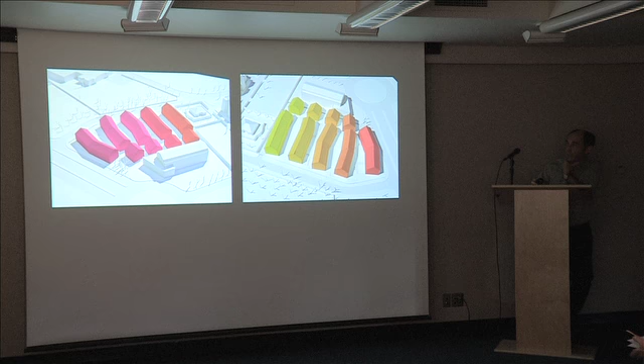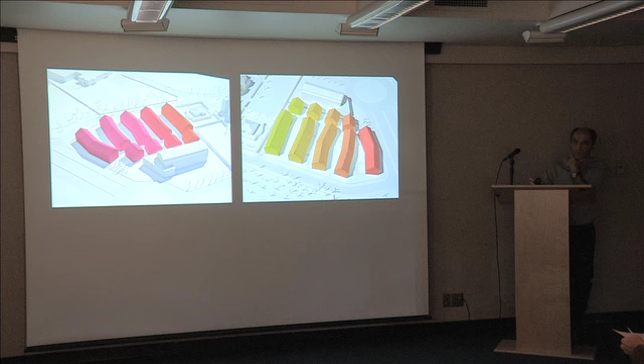And I think that -- I'm going to try to show this through 3 or 4 examples, depending on how long it takes. This one I think is a housing project in Spain which gives a fair account of what I'm trying to say. This was a competition for a public housing project, in which the regulations of the city for housing literally mismatch the needs of the client, which was a public client. That tension between those two conditions, I think, describes quite well how architecture faces, or how architects face very often, the reality of the problem.

On the one hand, the regulations basically define a geometrical container within which architecture had to be contained -- the shape of a traditional house with its pitched roof, 7 meters tall, 45-degree angle inclined planes for the roof. Within the boundaries of that mathematical or legal shape, everything could be done; outside those, nothing could be done. Which is a weird way of making the norm, because the norm should be about all things, but not capable of defining so clearly and so sharply.

And then on the other hand, we had to build 75 units. And the only way in which 75 units could be built was by using the whole volume that the legal norms allowed for.

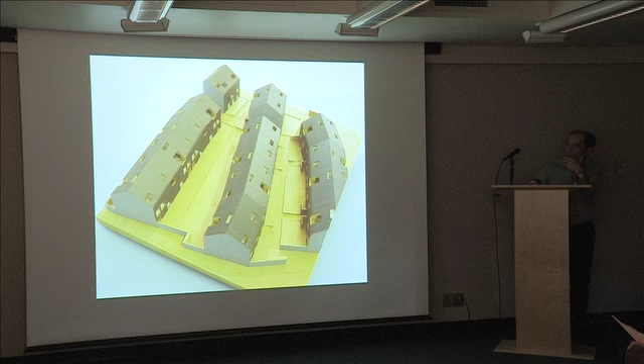So we had to occupy the whole section, and we had to work with a section that was given to us, with a profile that was given to us—not without irony—it was a profile defined legally, but that carries a tremendous amount of iconographic value. And that was, for us, the way in which this almost absurd problem of clients asking for things, and law asking for other things, and site conditions defining certain geometries and boundaries, etc.

We tried to resolve the problem within these three paradigms. One of them, of course, is repetition, because housing units, mostly public housing units, are the result of repeating a particular number of units. There might be several of them.

On the other hand, there is an issue of repetition and uniformity, and then there was also this issue of the iconographic container overlaid over the project by the law, and then the technical resort to prefabrication in concrete in order to create an envelope, a surface—what I guess Scott has referred to as a crust—that would provide, on one hand, uniformity for the whole number of different units and different conditions, thus defying repetition, and on the other hand, allowing us to change the perception of that iconographic profile, of that container with iconographic qualities that we were imposed or had to use.

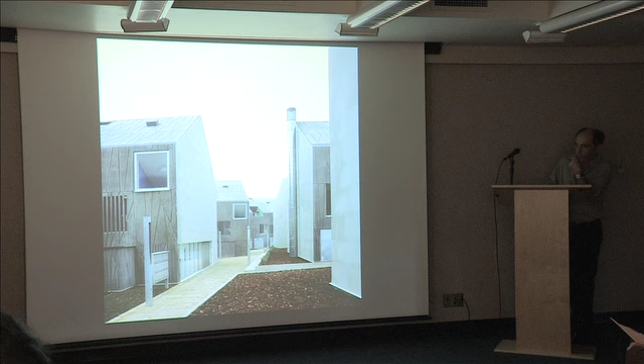And that's what the project is about. So at the end of the day, this is, I think, a very contemporary use of technological means—in this particular case, the technological means of prefabricated construction.

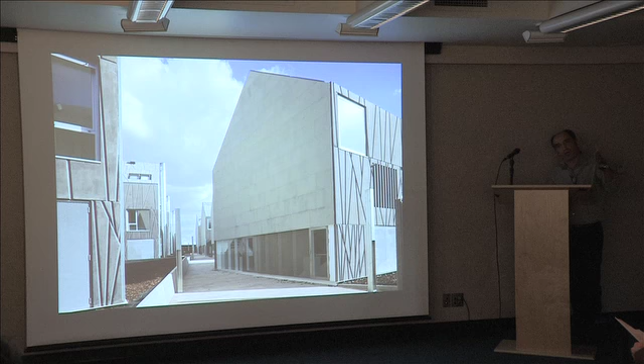Because prefabricated construction in concrete allowed us to introduce another layer to that idea of continuity, which is the ornamental quality of the striation of the concrete panel. This is basically the result of repeating a certain pattern, but by literal displacement and change of scale, change of level, or change of position, it increases a tension between the idea of the envelope as a kind of crust, creating a figure of continuity that has to do with the volume, independent from the repetition of units inside.

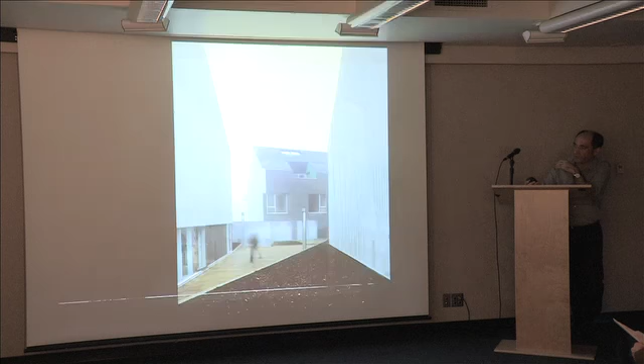And creating a unity that works for the spaces, which are actually even more important to us than the units themselves—the spaces within the units, the sort of pathways and gardens and internal streets that are created and built within the blocks.

These are views of the interior units, which are of two kinds. There are the ground floor ones, which are side to side, and they use the garden on both sides at the ground level.

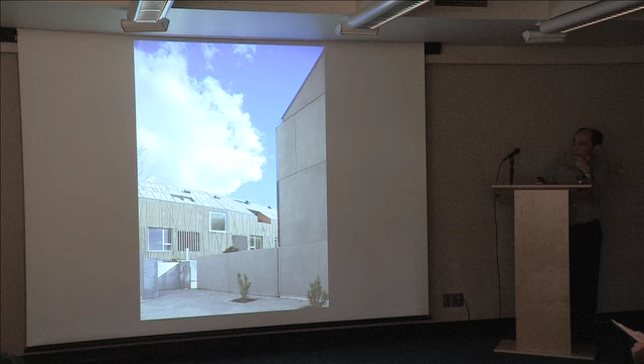And then the ones on top, in order to deal with and resolve the problem of the inclined plane of the pitch roof, we developed a kind of duplex unit that allowed us, depending on the orientation—north or south—to have two different kinds of conditions. In both cases, using the stair. One was based on the idea of having a double height.

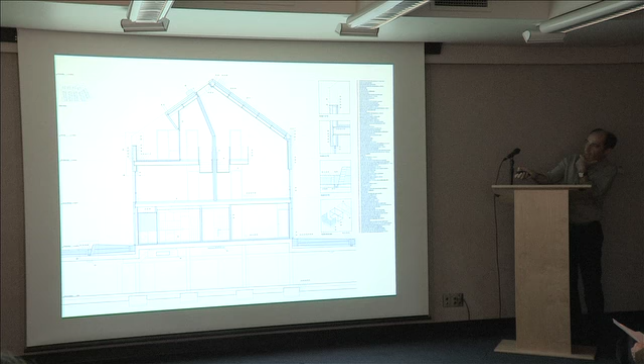In the case of the unit oriented towards the north, the double height allowed it to get sun or direct sunlight from the south. And the unit on the southern side used this little terrace, which is a kind of appropriation of an outdoor space—the same one that the units on the ground level are using.

This is the unit at the ground level that works in this direction, perpendicular to the longitudinal axis of the block. It's constructed around two units of bathrooms, and then the rooms are placed around in a rather open way within the limits of the number of bedrooms, and then some open or outdoor spaces are either embedded inside or left in between, in order to create continuity or connections perpendicular to the block.

With the gardens, while the duplex units above work in the opposite direction—along the longitudinal axis of the block. The one to the southern side has the terrace above, and the one to the northern side has the double height that allows for jumping over to the other side.

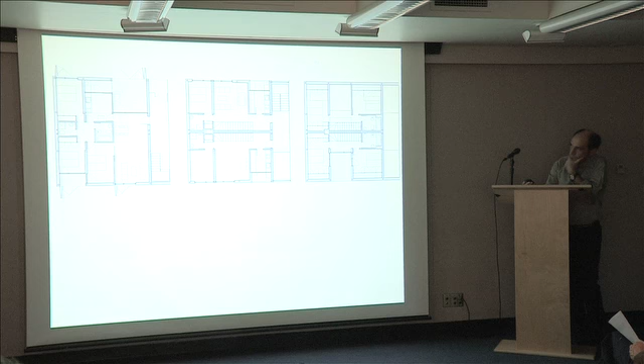I think that no matter how tight the problem was, given all these preconditions that have to do with reality, with the way things run in this world, money and law, we try to protect architecture. We try not to feel that the general disorder of the world prevents producing an architecture with aesthetic value. On the contrary, we think it is precisely the capacity of architecture to organize, with architectural instruments, the particular order and system of a problem that we're interested in.

The drawings are just an expression of those mechanisms, just evidence of them. The mechanisms have been chosen in order to establish a relationship with that complex reality.

In this particular case, the disengagement between the crust and the inside is expressed in the section, because all these units, halfway between repetition and difference, get covered or enveloped by one scheme that is indifferent or independent from the spatial complexity we have inside.

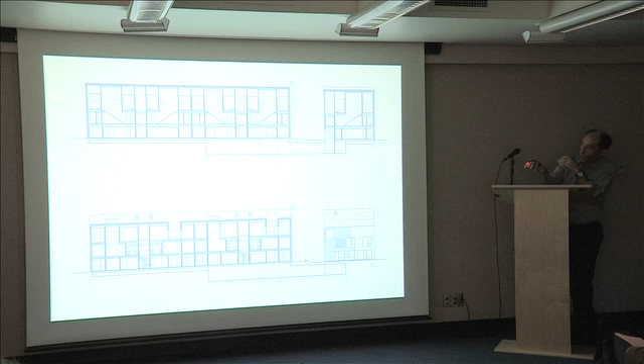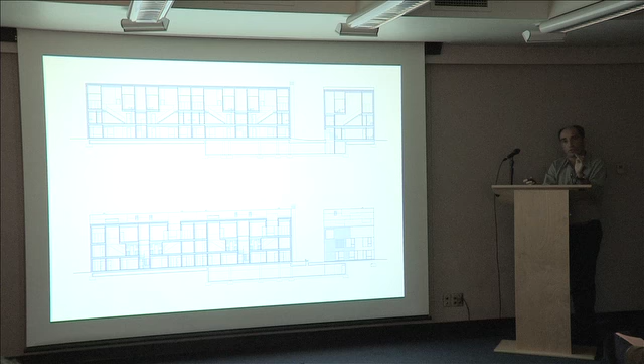All these differences in space do not come through to the facade, because all the windows establish that condition — all the windows are the same size, same dimensions, same type, 220 by 220. They might be displaced, find themselves in between, create more or less density, but they get repeated systematically to increase the tension between what is contained and what is the container — the continuous nature of that solid container, which has been ornamented with an arbitrary pattern.

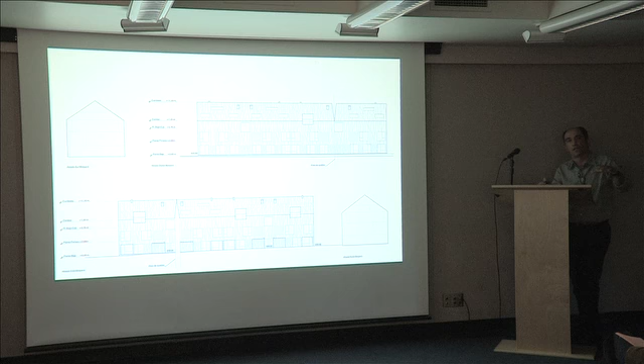This has to do literally with an idea of ornament, and the spatial manipulation of a repetitive system contained and confined within that crust, in order to provide a filter between the expression and non-expression of the unit, and the capacity to work with the interstitial space between the blocks in another, different way.

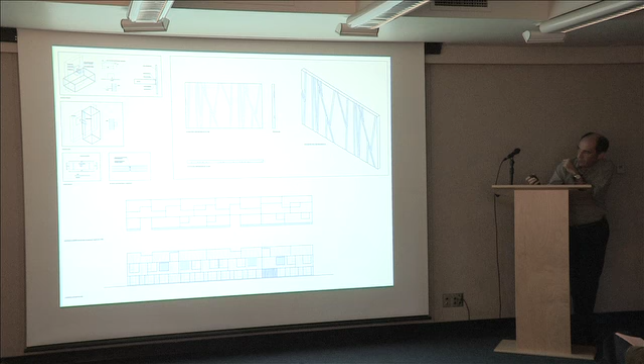These are the panels, 12 centimeters in width — 10 centimeters for structural reasons, 2 centimeters for the pattern.

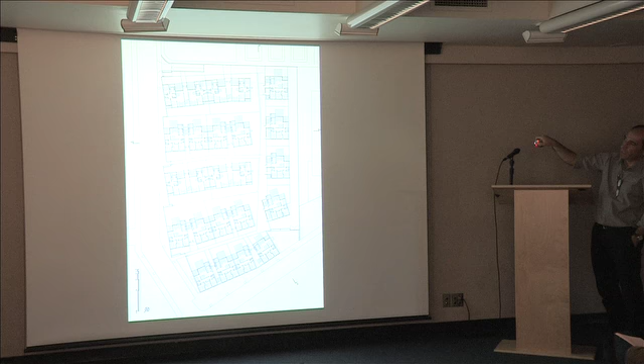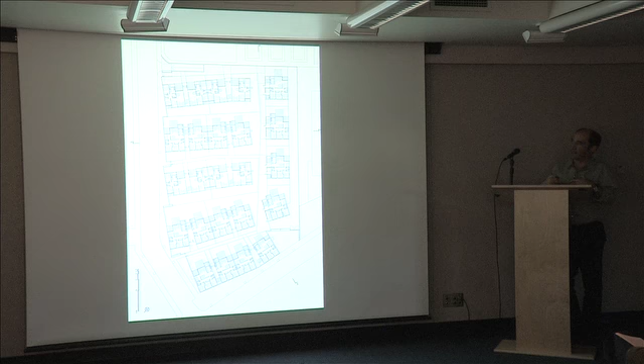Then we can manipulate those blocks according to conditions that have to do with gardens contained within two blocks, or gardens split by entries, and the blocks that have the exits from the parking, etc. — all conditions that look for a kind of expression that is literally contained or repressed within a continuous material system.

So I guess that has to do with a very contemporary use of technology — the use of the technological device of precast concrete — in order to undermine and at the same time transform a particular iconography contained or offered in the shape of the pitched roof that we have to deal with, but transform. We have to live with it, but take advantage of it. And I think this is an architecture which is...

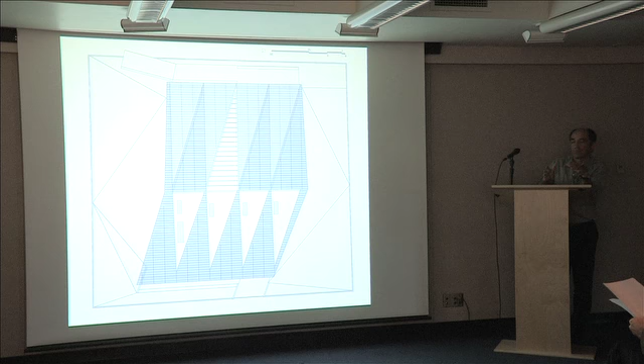As a consequence, archives have their own technology, a technology of fire extinguishing. And to do that, they've discovered something that is the result of common sense: the best way to resolve a fire is to avoid it. In the end, archives — at least in Spain — are a number of concrete boxes piled one on top of another, creating a regular modular room system that, through this repetition, creates ambiguity between whether it's a modular system, a structure through repetition of a unit, or a geometrical pattern in space.

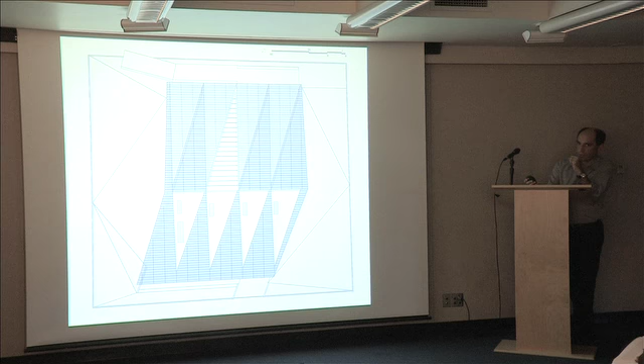The problem for us, as it was given to us in the brief of the competition, was that there is a part of the archive for the archivist and for the public that is basically detached from the rest of the program. So on one hand you have the storage, and on the other hand you have the people either working or accessing the archive.

I think we won the competition because we tried to undermine that condition, because we thought architecturally this could be redescribed in more interesting terms if both, rather than being separated, were together. Rather than having a building made of two pieces, a large piece of storage and a small piece of public access, we could introduce the two together within one single structure.

And when I mean structure, in literal terms as well as in spatial or factual terms. What we tried was to define, in a rather straightforward way because of fire extinction regulations, the unit, which is this one - an issue of the volume of air and paper that can burn in a certain amount of time, giving a certain power of fire that can be extinguished.

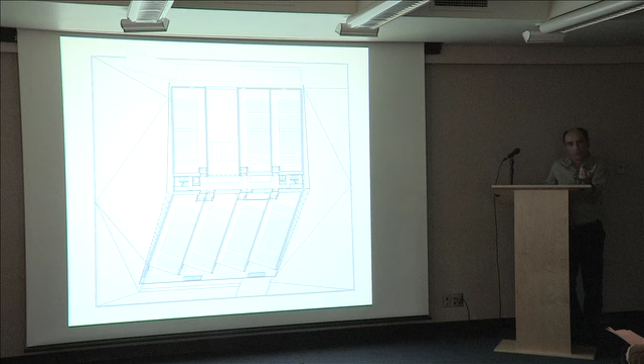And the repetition of that unit in a system has its own regularity and its own geometry. Once that geometry and regularity is established, as often happens in architecture, the next steps have to do with working against those rules, working against that coherence or system, without breaking it, without going too far away.

In order to change, adapt, transform or deform that geometry, we had two arguments. One was the argument of the public areas that had to be used by the public, which demanded a larger transparent or open space that was at odds with the idea of compartmentalization of the storage space.

And the other argument, you can see here - basically you have the repetition of the units, and then at a certain point there is a breakthrough. There is a moment in which that system of repeated concrete coffins is broken by its opposite idea, which is the idea of the panopticon, the recreation of total visibility.

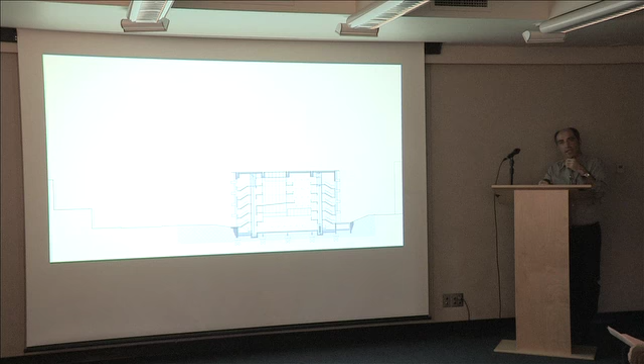It's not just that the public would enter the public area, but people would enter the building and would understand, because they would perceive and see, they would get access to the whole structure of the building - like a panopticon, like a static moment of total visibility, which completely undermines the idea of solidity and the concrete posture.

This is how we worked this out. We tried to work it out using a second level of transformation, or a second level of distortion of the grid, that has to do with its position in the city.

The building is facing a park. It's facing to the north, and to the west another public building which is important in the city - a social institution for social help and stuff like that.

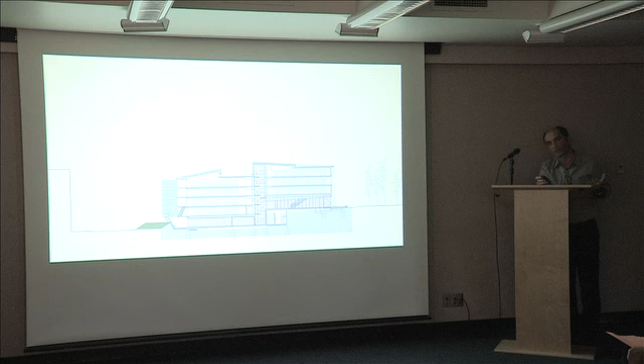And it has a very prominent slope as you go down to the back, to the northern side of the site. This is what we tried to work out: there is a gap that runs from the public area to the central spine of the archive, to the area where the archivists work, that has that condition of transparency moving along the slope of the site, creating a gap - a hollow part of the grid - that allows you not just to see but to understand the whole structure of the building, making it, so to speak, transparent.

And there is a second deformation that has to do, as I said, with the conditions of the site. One is this concave figure facing the other public building, and this concave one for a pedestrian passage that happens on that side. And then there is the frontality to the park and the frontality to the back that creates a continuous stripe of vision along.

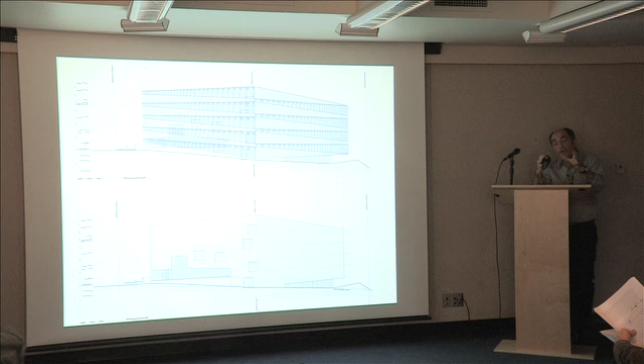There is a conflict between the internal quality, the opaque quality of the building as such, and the way it tries to play a role within the city. The archive is a safe box, and it has no windows, so it very easily becomes an opaque object within the site with very little connection to the existing or surrounding conditions or the patterns of the city as they are worked around.

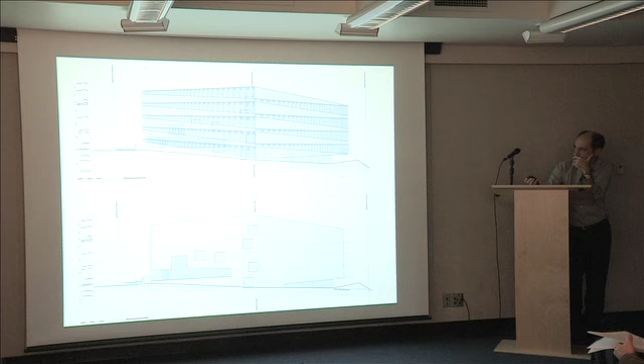What we tried to do was make sure that the building would not read as being supported on the ground, but letting the ground run through and touch, showing this mechanism of transparency working, entering from the park at this level and exiting on this upper level, which is what we tried to keep here in the model.

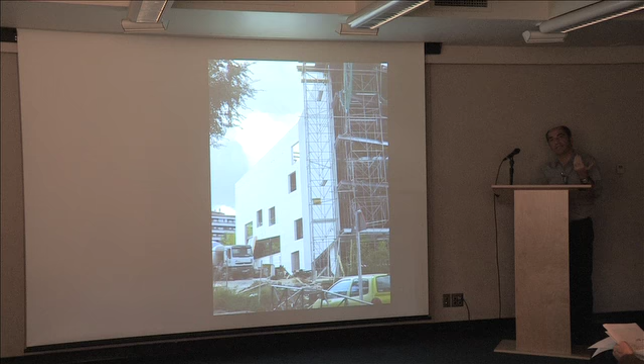And we constructed it according to this sort of dilemma between the solidity and opaqueness of the cover and the degrees of transparency that could be achieved by means of these operations or other materials.

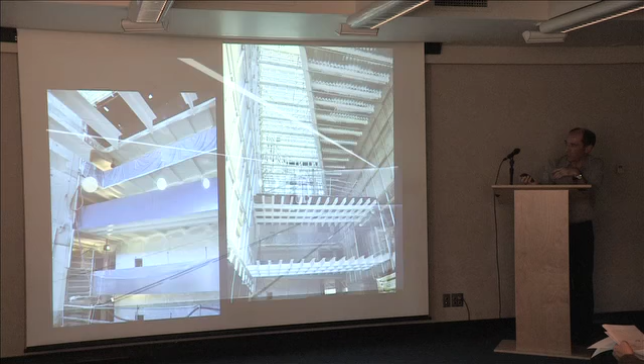We started with building the structure in white concrete and creating this modular system of the coffer, the archive unit, which is filled up with the shelves and documents, and then hollowing and distorting the grid in order to create spaces which are deep enough, in the literal sense, to show the spatial structure of the hidden part of the building.

This is the facade from the inside to the south, which has a special kind of glass that has a wooden system inside in order to control the sun and create the kind of shade.

And this is looking backwards, moments in which these are the areas where the archivists work, and these are the areas where the public stand.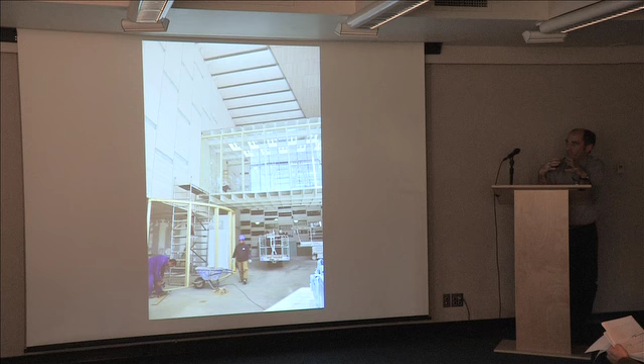And we developed this sort of transparent device, which is basically a structure that holds glass for roofs and walls, and it's able to interlock itself with other spaces, creating that sense of continuity and division at the same time.

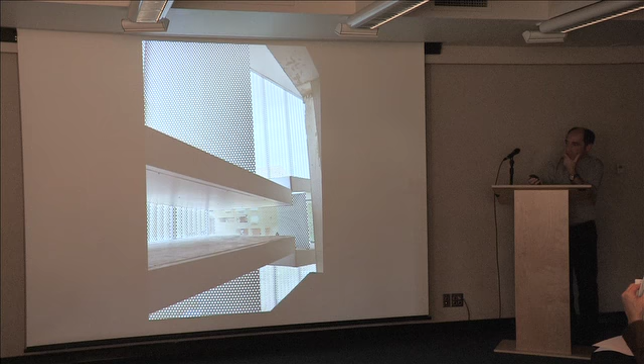...aluminum metal panels that have been worked out in order to scale down the mass of the object that is introduced within the city without scale, because it has no possible literal transparency from the inside to the outside, but it has to be worked out with invented transparencies, with manipulations of the skin in order to control the perception of depth, the use of shadows, the degrees of transparencies, etc.

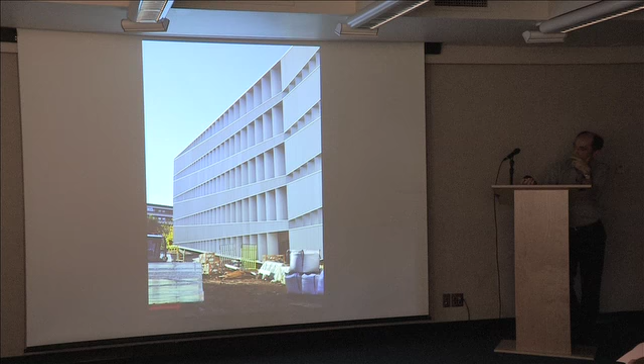This is the concave side facing the other part of the building. These are the two mechanisms we are using, which is always based on a technical problem: unless you fold the aluminum plate, you cannot work with it. It doesn't have the rigidity to be used on surfaces of large scale.

So in order to be used, in order to be transported, in order to be placed within the facade, it has to be folded. And with that idea in mind, what the facade actually does is recreate the idea of increasing the rigidity of the surface, with this metal panel that has been perforated in different ways in order to create large pieces capable of holding themselves rigidly, which can then be placed on the facade with a light structure in time.

And then the northern facade, which is this one, which we were told is the only facade that would have windows to the coffers, to the archival storage space, because that kind of light does not damage the documents, since it doesn't bring sun into the spaces. But we have to double layer the facade with certain depth, so that the light will be very dim and quite controlled.

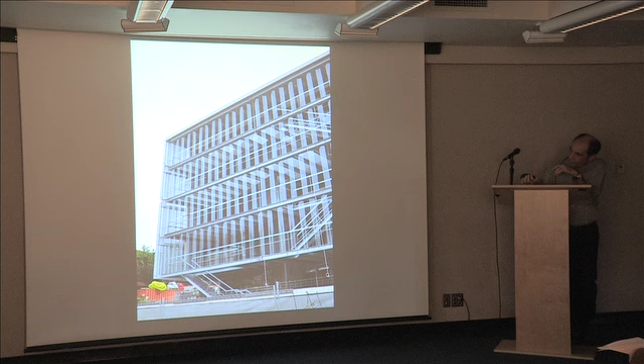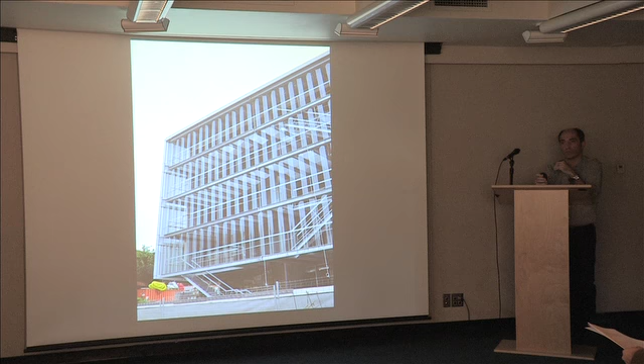So rather than making two layers of glass, what we developed was this other layer of glass on the outside, which is curved, so that it distorts the ray of light and it does not go straight all the way in. From the inside, it creates an effect like a kind of special lighting.

So what you see towards the outside is a distorted perception of the city because of the refraction on the concave shapes of the glass.

This is the entry to the front facade that, even if it's frontally facing the garden, is accessed on a diagonal from the side, which is where there is a connection between the front garden and the lateral street facing the public building across, and is responsible for the deformation of the grid.

This is just to stress an idea I've talked about often in the studio: that it's possible to determine which systems, even geometrical ones, work in such a way that they accept a certain degree of deformability, a certain degree of change, without betraying their mathematical or technical, geometrical nature, in order to play this game of a system confronted with peripheral conditions which distort the system.

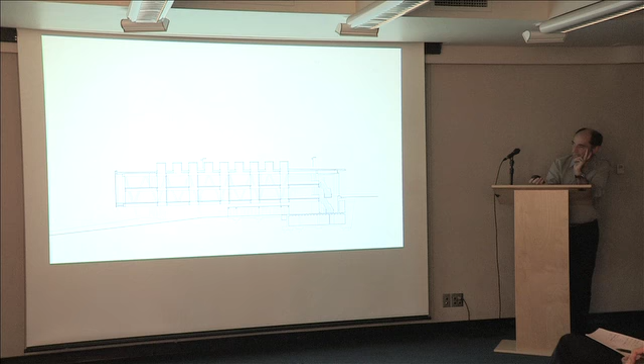And this is how we started developing the project, in which the large span structure was pushed to the edges, and the platforms were built with a prefabricated system. Then light was brought into this fat building by means of a system of skylights that would work their way through the section, either lighting the room on top, the room on the low level, or the space below.

And sometimes the structure of the building would sustain a certain regular geometry, and sometimes it would surrender to deformation, trying to imply the idea that the building was not just a piece of the city, but an outdoor piece of the city built indoors — like a chunk of the city confined within this large-scale structure.

And this is the lobby that runs across, joining the three elements. This is the only one in which there's a very particular program specificity because it had a theater inside.

And this is how we built it. We built it in steel, creating a large-scale steel structure that would then be filled in either by the regular system of prefabricated concrete beams, or by the ones in wood when the shape of the building has a certain amount of deformation.

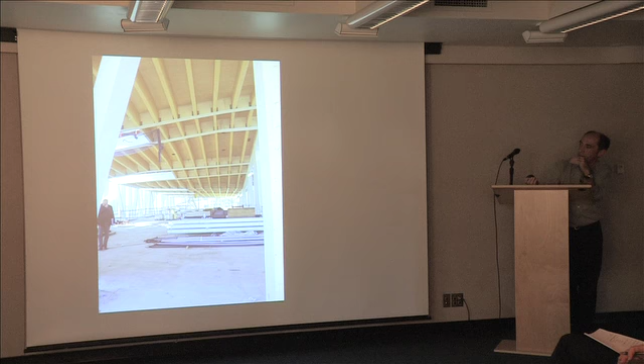And this is what I mean by the tension between the fragmentation of the pieces that we see in the plan and the uniformity of the material and the structure, which is continuous all throughout. This was a few months ago, and this is how it was finished.

This is the industrial glass, the U glass, which is insulated inside with the system that is responsible for the blue color.

These are the spaces in between every finger and the space underneath, for now being used as part of the kids' library.

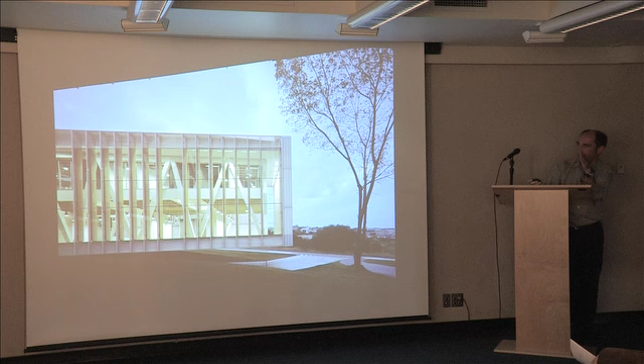And again, you have the same system. This is built in wood, and this is built in concrete, confined within the steel frame, but they are both the same dimensions, both the same sort of pattern. The wood allows for deformation, the concrete doesn't.

Now, this is predicated on the idea that the furniture is going to be able to resolve the program specificity, which is what we proposed them to do, and this is how we got the commission to design the furniture, which is even more difficult than designing the building.

If you want to define a particular spot for a particular use, what you need to develop—this is one example, the first one we are working with—is just this furniture, at the entry of the building.

You have to rely on the fact that there is a next order of functional specificity that has to do with the function and with the use. And this is the plan of the ground level.

You can see here there is the lobby running across, and the different areas which either you define with the furniture, or they are just a system of platforms with the skylights running across.

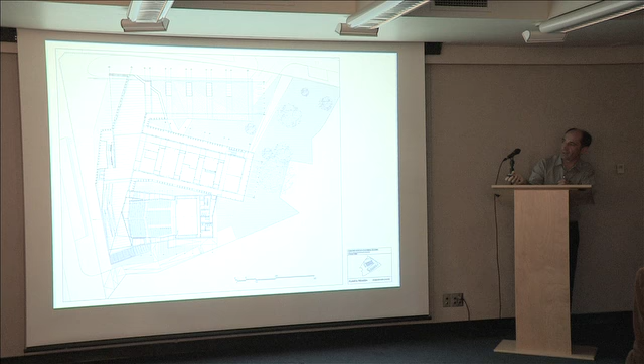Yeah, there's a master plan. So you fit directly and well within it? Yeah, we fit within the master plan. For example, it was a kind of a problem for us. At the same time, some of the ideas are that the building, because of the way the infrastructure is defined in the master plan, privileged the fact that the building was backwards, looking outside the city rather than towards the city.

So when we decided to... Because that's been made a large block and yours is on the outer edge, on the new edge. So it's not backwards, it's facing out, it's a block and your building is on the perimeter of the block. It just so happens you're on the edge, which is the new edge. That whole thing is a block now. Yeah, no, more than that. Keep going, yeah, all of that. Maybe even this was existing, and then they built a street across like that. But isn't your building on the corner of that block?

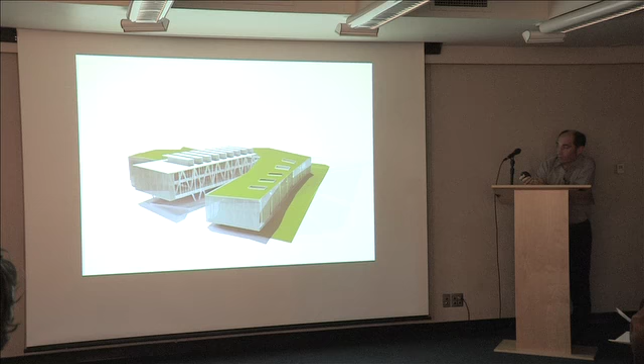I know you just mentioned the tension between the form of the object and the natural condition of the ground plane. There often seems to be corners revealed, this tension, and I'm wondering what the attitude was—could you elaborate on what those spaces between the building and the ground are becoming? Is that a general attitude you have towards a lot of projects, or just this one? Can you go forward to images of it?

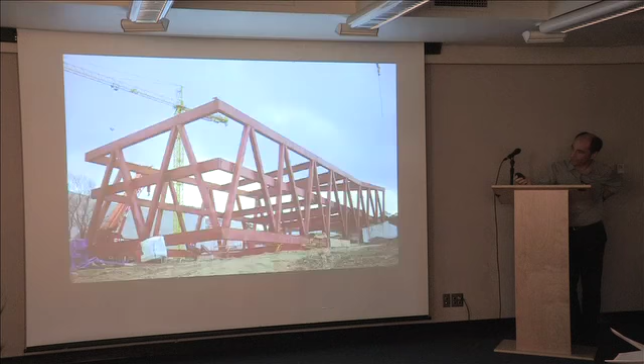Can you? Oh well, that's what he's talking about. But I want you to look at that too. But that's a different issue—it's about the roof. This is what he's asking. Yes.

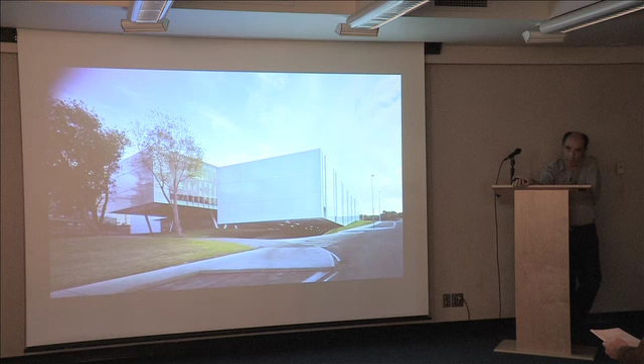There is a possibility, in this particular case, because of the urban conditions of the site and because of the public program it houses—you enter the building from below precisely because the entry to the library, one of the most used spaces today, is there. Once we did that, in order to ensure a certain permeability from the street to the inside, we raised this one and located the parking and the loading area down below this other solid.

We do this often. What I'm trying to say is it's not that we literally raised the building from the ground, but if you flatten the site before you start, you always get the same problem—as much as having one thing on top of a cliff. In doing so, you might relinquish the potential tension between ground that hasn't been touched because it was found that way, and the more unstable, imprecise relationship between ground and building that would facilitate entries, relationships between inside and outside, certain kinds of transparency, etc. Not literally that there are spaces below.

In this particular case, for that space to work, because of the very rainy climate, we located skylights that cut through the building and allow for lighting down below. At the same time they structure spatially, just by means of walls, the different modular repetition of rooms with which the specificity of the program is approached.

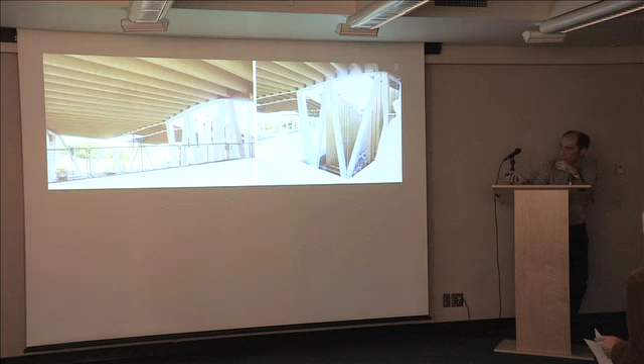Scott: Yeah, I wanted to ask you about the roof, because the roof is participating in something that exists today—this topographic condition of the soon-to-be-urbanized setting. So do you imagine this to be referring to something that jumps out to another limit condition? What does it represent when the master plan is completed? What does your green roof represent at that point?

An island? Because it has a very poignant connection right now—is it important to you that it makes that connection today? This again goes to the question of the duration of the planning, your indebtedness to the fragmentary condition that exists right now. How contingent is your building on the circumstances of the time in which it's built, as opposed to the fulfillment of that plan?

The master plan calls for towers which are 14 stories high. And for reasons that I... just thinking about what's going to happen. But again, what it's going to be once the whole thing is built—this building will be flattened even more so than it is now, and become the ground no matter what we say about it. So it'll be something you look down upon, almost like a park.

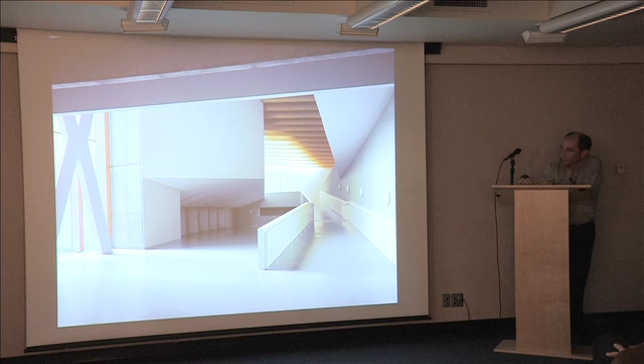So it's not a party wall like the auditorium. And in the auditorium project, he didn't show an older project. The party wall idea is the limit condition of the building as an object. It looks like a building that's cut out of a larger fabric in some ways, like the party walls of a freestanding building that you could imagine other buildings will add to.

So this is the opposite, where it seems to me this is the wall that—well, retaining wall would be a better way to think about it. That particular side of it was. But this, on the inside, it's more like the corner.

Just that thing that comes out like a skylight is the one that brings the light all the way at the end of the lobby, so people that would move all the way to the end and then backwards would have that advantage.

So this is between the underbelly and the top we looked at. But that's that glass emerging. I mean, where is that glass that comes out of the grass? The glass that comes out of the grass—it's up there?

Above there, so you don't see it. No, you don't see it. I mean, you don't see that form from inside. No, from inside you don't see it because the pattern of the beams, they go all the way down, and do not allow you to see that as a feature. You see it from the outside.

Very strange, or under the earth here. So buried, yep. But you don't know it. It doesn't look that way at all. Oh, this is a retaining wall. Yeah, I can take that back.